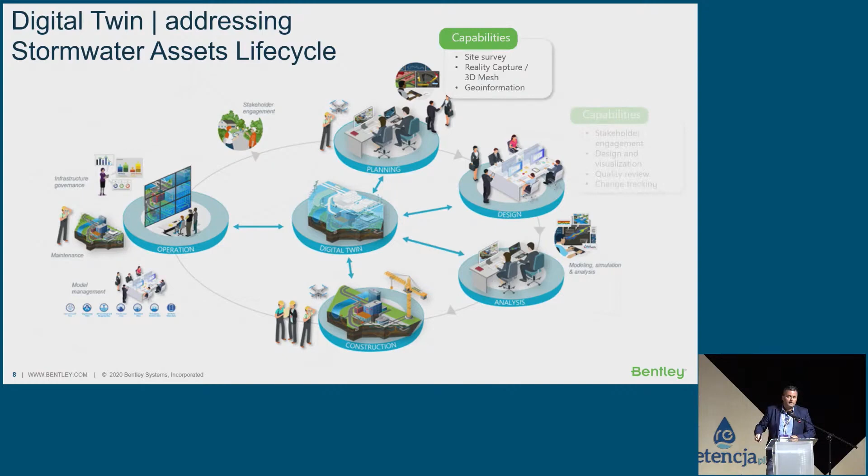So the same digital model can be used for planning a low impact development in terms of mitigating flood risk, designing various scenarios and options in the analysis. Then the same digital twin is used for construction as-built. So we have a digital model of how it's constructed, and the same model is used for operation and maintenance in 50 to 100 years to come. That's the role of the digital twin, supporting all of the functions in the organization, not just a fancy visualization or presentation of the model.

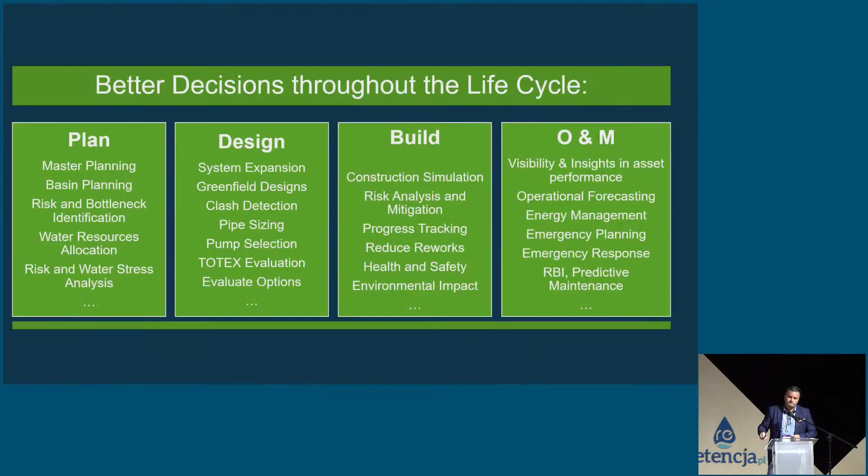Now, what are the key differences between the traditional, conventional way of doing things and a digital twin? One advantage is turning static data into real time, so instead of looking at spreadsheets we get more advanced data analytics. We're talking a lot about hydraulic modeling, understanding the behavior of the system, and that model should be constantly updated, even automatically. Instead of looking at maps, drawings and profiles, the digital twin has intelligence inside which can tell us where the bottlenecks are automatically, where the alarms and alerts might happen, what should be the inspection time of a certain chamber or manhole, and facilitate better and faster decisions.

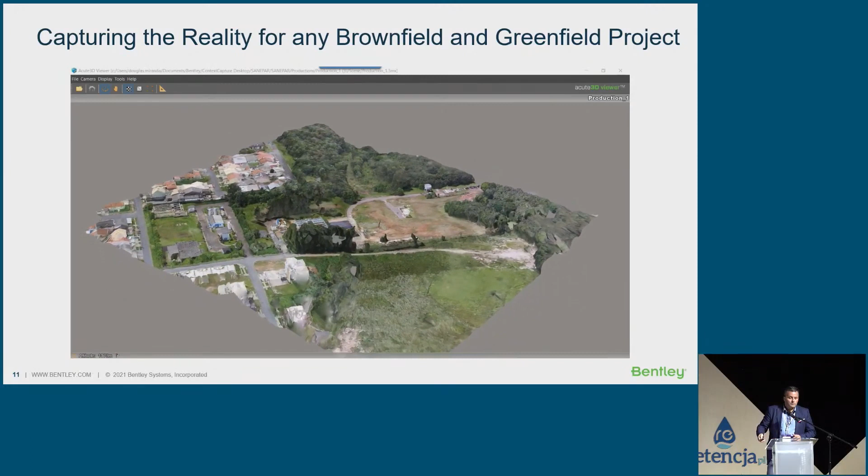So moving forward, I'd like to show you a couple of things about the digital twin. First is capturing the reality. If you're doing a brownfield or greenfield project, for example to do a low impact development in a certain area with retention tanks or ponds, you need to capture the reality very carefully. Elevations are very important, contextual elements, trees, auxiliary infrastructure. Bentley has technology that can use satellite images, drones, and geodetic measurements, put them together, crunch the numbers, and present your base digital model for design. That's the first step.

Second is managing information in a connected data environment where there are drawings, models, some GIS data, rainfall information, etc. All of this can be modeled in the same environment with the same contractors - for example, if it's the city of Katowice driving the project with many companies working on it, this connected data environment starts building the digital twin. So you're building it as you go, with design drawings that can later be utilized to manage that digital twin.

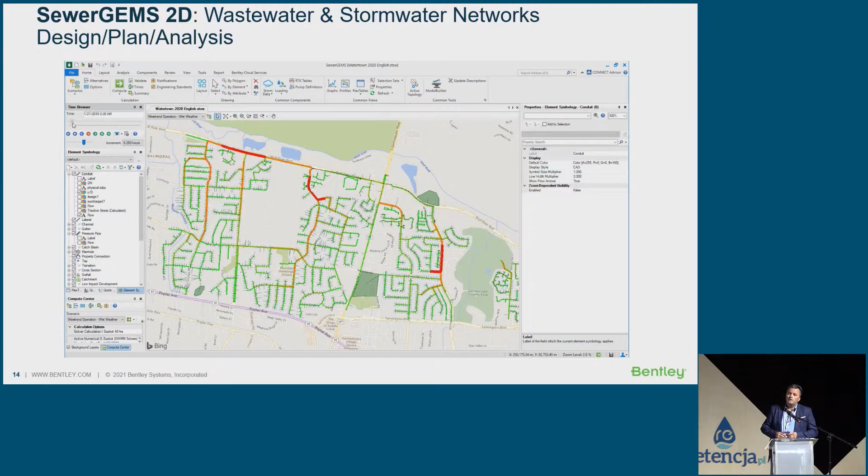Of course, modeling is very important - we've heard a couple of presentations about modeling today and yesterday. This is an example of SewerGEMS 2D: the wastewater network and the storm drainage network, whether separated or combined. You can run that analysis with different components imported from suppliers and manufacturers, like retention ponds, green roofs, etc. You do this analysis to see what is the optimal solution in order to implement it, still in a 2D environment.

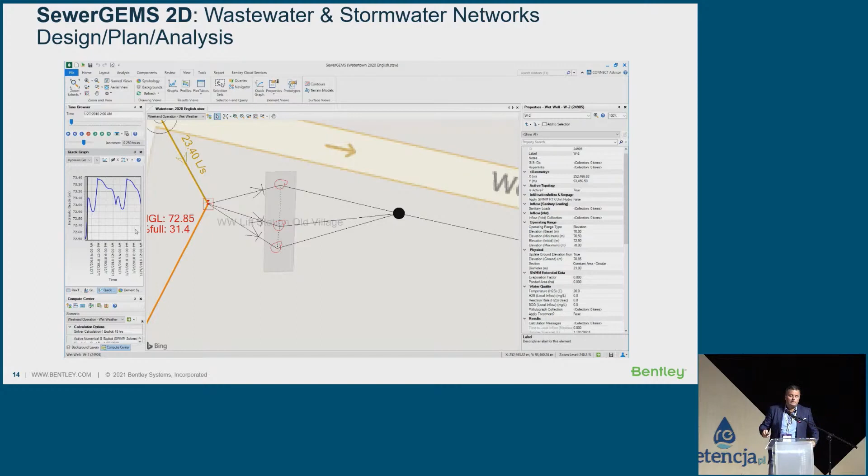Clash detection capabilities are very important. If you are designing something new and there is underground infrastructure already there, you need to know the corridors, the excavation corridors, the volume of earth involved. So clash detection is becoming very important, because underground is also very busy.

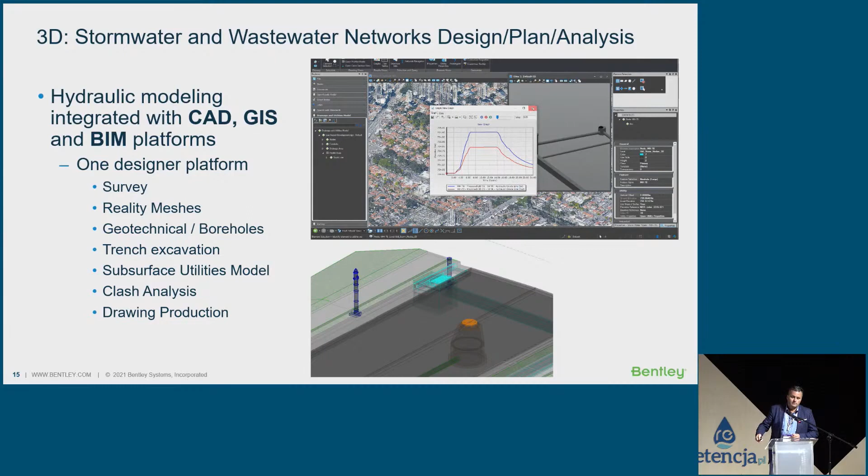We are also moving, in discussions with colleagues who came to the stand, towards real-time operation. Once we construct these intelligent storm drainage systems, sustainable urban drainage systems, or low impact development as we call them, which is low impacting on people but also on the environment, we see a trend that many of these intelligent retention systems are equipped with sensors. They monitor flows, water levels, and the pumps, for example, which are pumping.

How do we bring this data together, and bring the model we already created in the design phase, to become more operational? For that, we developed SewerSight over the last 3 years. This is an online platform which basically supports storm and sewer network operation and real-time visibility. The building blocks are very simple.

First of all, GIS data - everybody has some sort of GIS. Second building block is a hydraulic model, preferably, because we cannot measure everything. The model will tell us what the bottlenecks are. And finally, the telemetry, SCADA.

Rain gauges - many municipalities in Poland are now investing in rain gauges. But how do we use this data? Once we have the rain gauges, we would like to feed this data into the platform. Then, of course, monitoring pumping stations, water levels, flows, and potential blockages in the system. These three components are really a must-have to create such an intelligent, online platform.

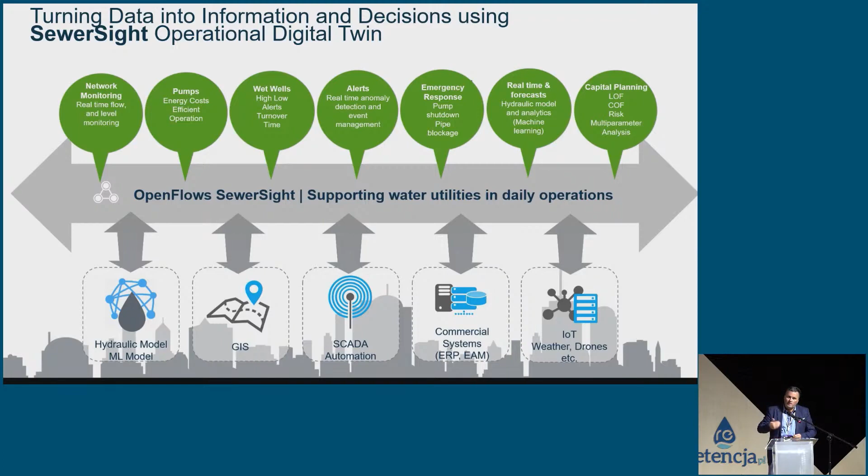First of all, network monitoring. Second, what is the capacity in terms of retention? What are the current alerts? Are there any events happening currently? If a storm event is coming, predicting the volume, the peak volume, and even anticipating pumping in advance. So this becomes really a platform for real-time simulation and monitoring.

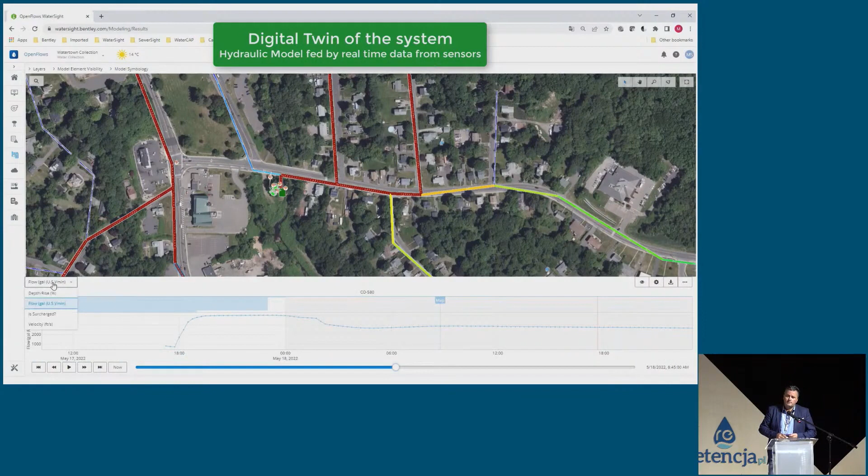Just to give you an idea how it looks - we implemented this in Porto, we implemented this in Rotterdam, we implemented this in DC, Washington, and now we are talking with Warsaw Water. We would like to start a small pilot, both on the sewer network and the water network as well. This is really a real-time, web-enabled emergency platform.

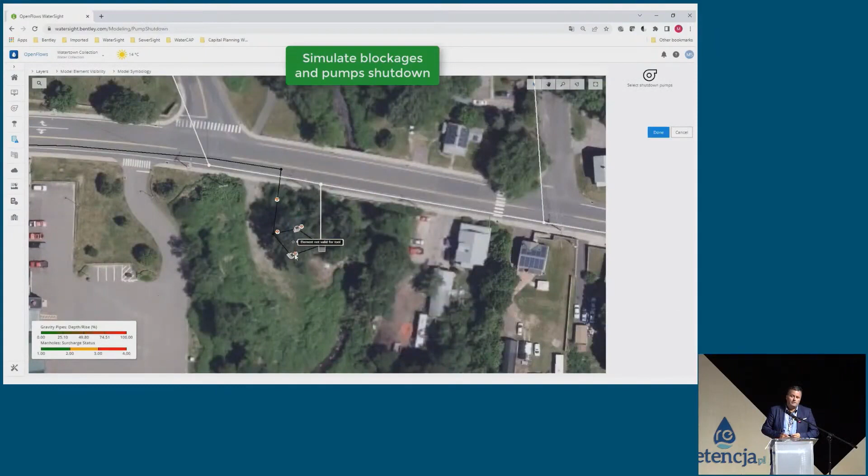So if you would like to simulate some if-then-else scenario - if I need to switch off this pump because we need to maintain it, or there is a planned scheduled downtime - which manholes will be surcharged?

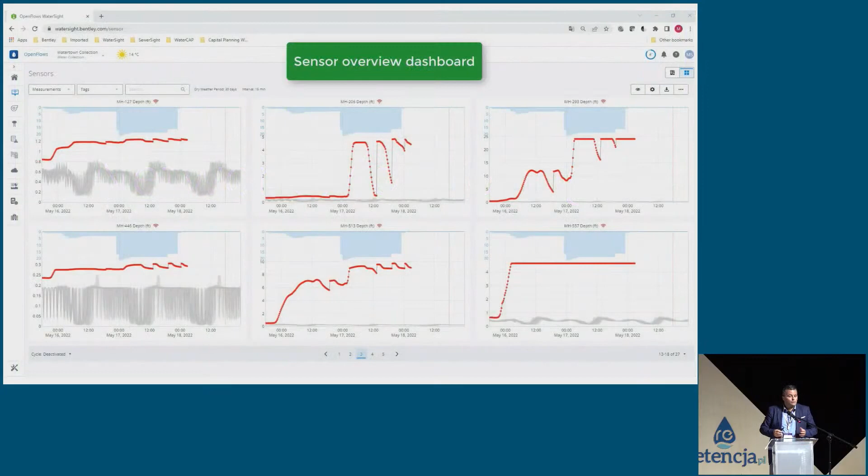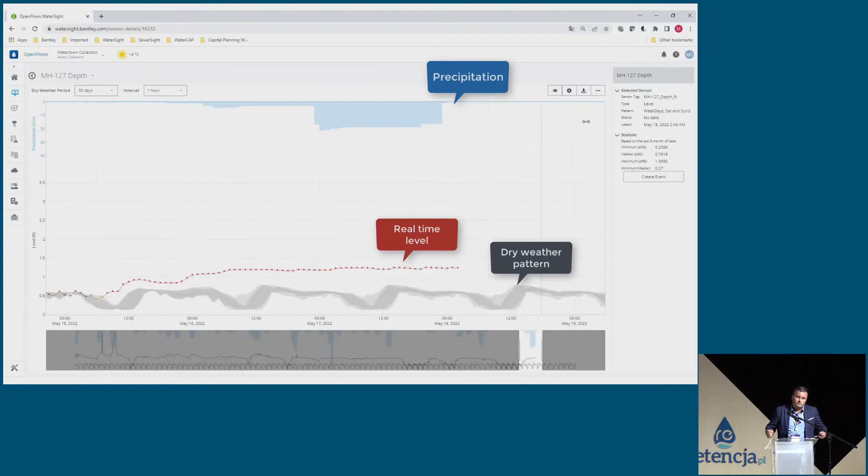If you want to monitor, for example, the rain gauges and compare them with previous events, we can see based on the anticipated weather forecast and the rain gauges what they're telling us. With the simulation model, you can compare dry weather, business as usual like today, and wet weather which is coming - what is the anticipated level, how much flow comes in, again 7 days ahead.

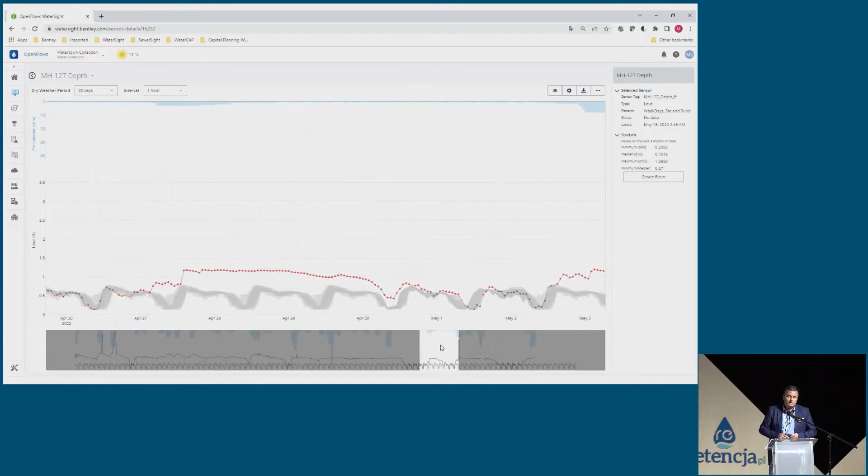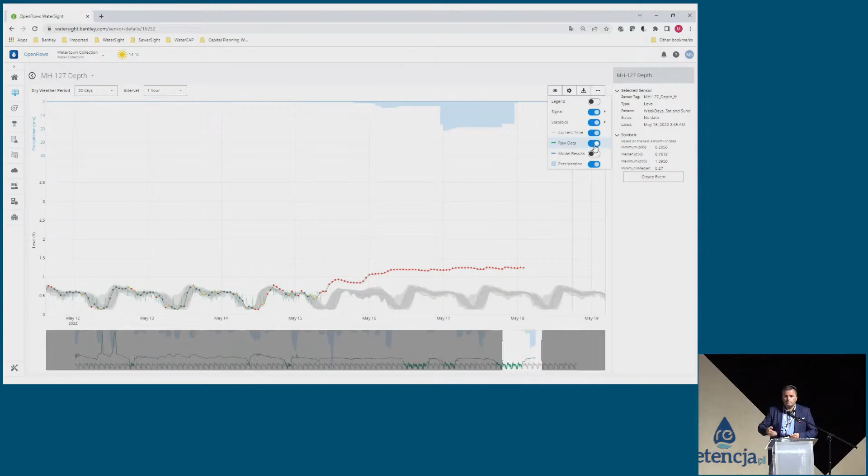This is very good for managing the retention systems, but also for managing the wastewater treatment plant, because the wastewater treatment plant in a combined sewer system doesn't like peaks. It likes a steady flow, which can be treated primary, secondary, tertiary, and then released into the environment.

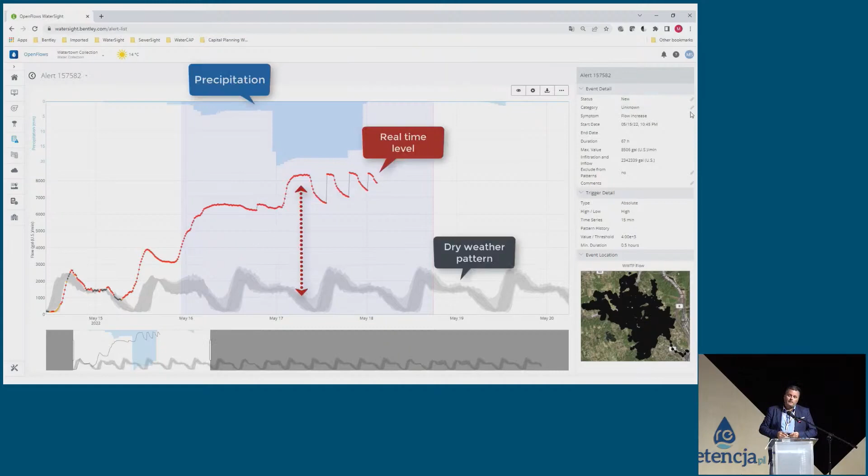So, alerts and events - the software uses machine learning techniques because we have a lot of data now coming in from sensors and from the models, and the software can automatically recognize some events and say, okay, this is mostly runoff volume and potentially infiltration. That event can be generated automatically and sent to the operational team, who are monitoring the SCADA system and the network itself.

If there is a big project, a pipeline or a sewer tunnel for retention that needs to be constructed, like the sewer tunnel in London or in Stockholm, these are big pipes which affect people.

It affects people for 2-3 years during construction. You can publish this information on the internet or on the website of the municipality or water company, and ask for feedback on the project. More communication towards citizens is very important to get buy-in for this type of project.

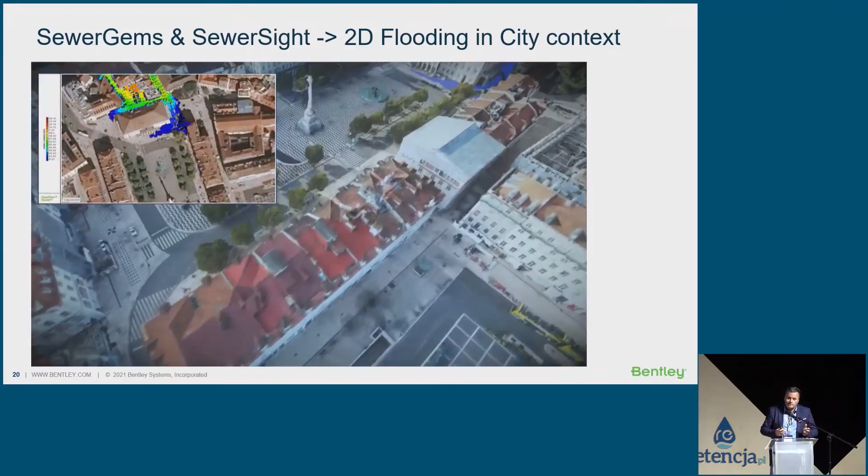Finally, visualization is always good to show decision makers what we mean by climate impact and heavy rainfall events. This is the city of Lisbon—this is the city centrum, the municipal building. Like in Katowice, we have the municipal building, and mostly what happened is the municipal building was flooded during rainfall events. While visualizing things to politicians and decision makers, they immediately understand what the project is about and what impact we will make.

So communication and visualization is very important. I will not go too much into details, just to share two international examples with you. This is the city of Porto, where we implemented this WaterSight and SewerSight, for both the water network and the storm drainage network.

They have some low impact development, green infrastructure, including the beaches. Water is collected from the storm but it comes to the beaches, which is a very touristic area. Sometimes if you have discharges that are environmentally unfriendly with dirty water, the beaches are closed and you have to put red flags on the beaches, etc.

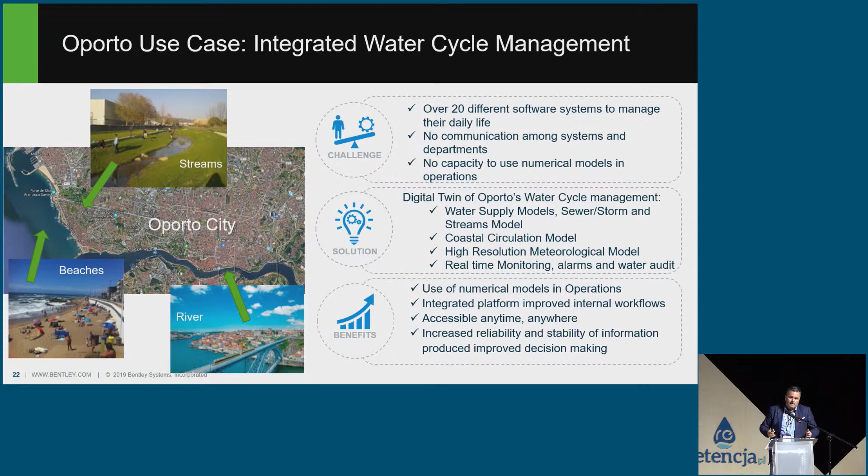So this is a complete system, an integrated water cycle management. Today we're talking only about stormwater, but it's not isolated from drinking water, the sewer system, irrigation, etc. A holistic approach is sometimes necessary in this type of project.

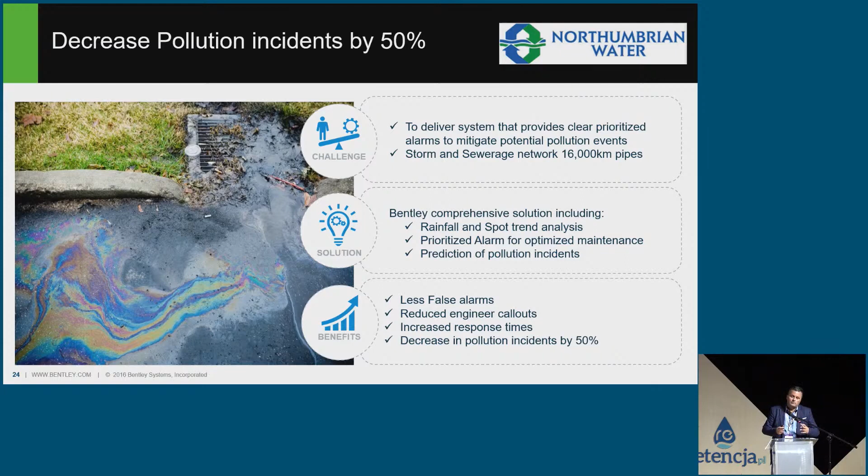This is Northumbrian Water in the UK, predicting storm and sewer overflows. You probably read that Thames Water was discharging illegally from their combined sewer systems, and they were fined about £70 million just recently. Big penalties are imposed on companies if they discharge into the environment, so getting a platform that combines all this information is beneficial for predicting sewer overflows and pollution events.

In summary, there are many solutions and technologies on the market, but for a specific project it's very important to understand the use cases first. Is it more about retention of the water? Is it more about longer-term sustainability of the complete system? Is it more about flood risk management? Understanding the use cases is very important, and based on that, choose the right technology and the right approach.